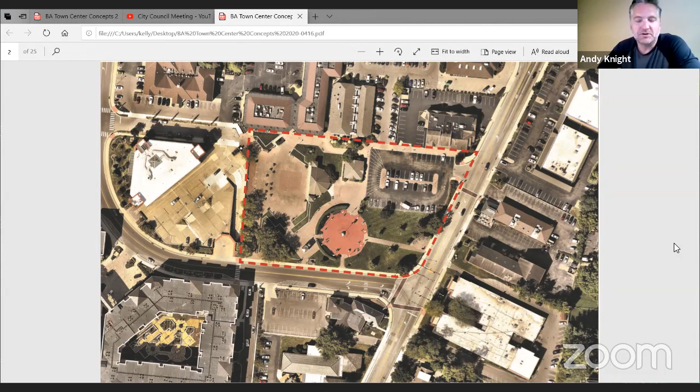So Kelly, if you'll advance a slide.

And we developed 3 concepts. These are just a couple of sneak peeks of what you'll see. We've got some renderings to give everybody a visual of what we've been exploring.

Concept A is to refresh, basically taking the framework and the structures that are there and improving some visibility, improving some safety elements, and just giving the park a refreshment there.

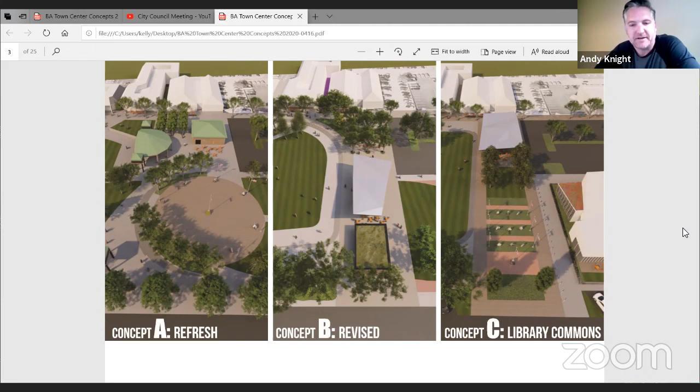Concept B is a revised concept where we take a look at repositioning some of the items, maybe making a softer landscape, more usable area. We've got some new residents at the 4900 that this is a space, this is their outdoor space, and especially with social distancing now, getting outside is becoming even more vital within our communities.

This is something that we want to be a resource, not only for them, but for the walkable community in the area, in addition to ceremonies and concerts. And then, as David was mentioning, concept C was more of a feasibility test to see what a 10,000 square foot library branch might look like on the site and how the site might embrace that and work together with it. So let's jump into concept A.

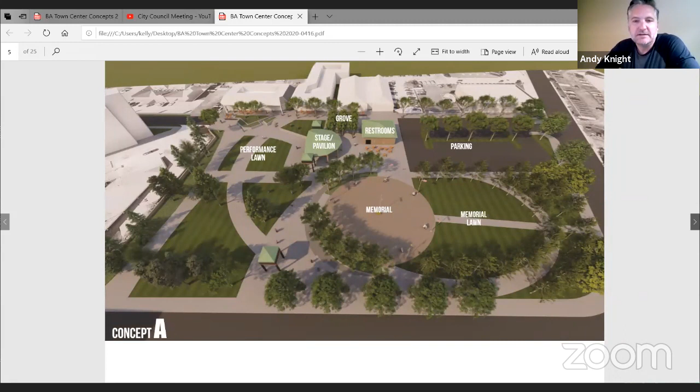You can advance one more slide, Kelly. Thank you. A little bit of a bird's eye. I've got a diagram that will follow this that will show you the different parts and pieces a bit more clearly. But you can begin to see in that large paver area that's existing today, peeling some of that pavement out and replacing it with lawn. That helps to reduce the heat island effect, and it makes it more park-like for daily activities, even for large or smaller events that happen there.

And we've got plenty - you all are well aware of the Summit Park lawn area and how usable that is when there's a concert going on. I actually have worked with Cleat on the development of a lot of that park, so I'm familiar with it as well.

The stage right now, at the edge of the stage, there's about a 4-foot drop, and there's a chain at the edge of it too, which is a little bit of a trip hazard since the stage is open to people. So one of the things we're looking at is installing a set of stairs on the edge of that stage so that people can traverse that a little more easily and have it meet certain code requirements.

Also, the memorial you'll see in this rendering, where we've removed the hedges and allowed for views from within the space 360 degrees, and put a set of stairs that traverse that grade change from the memorial down to the lower plaza area.

And then you'll also see that we've removed the terracing that is currently there in the bottom left-hand corner to create more usable space - maybe that's a dog park area. So anyway, those are kind of the highlights with this one. I'll go through a couple of views.

I think next is the diagram, Kelly. So you can see by and large, all the pieces that you're familiar with are still there, with the major difference here being that performance lawn and the event lawn.

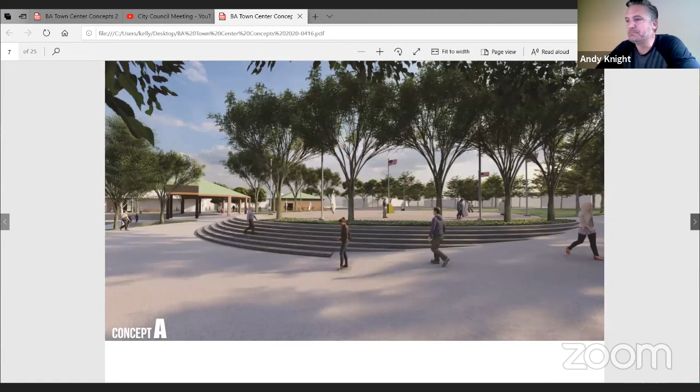One of the other things, Kelly, advance one more slide. You can see two different things in this rendering. One is the visibility of this memorial and the access to it now. There is a slope that as the Hunt Road moves north and south, there's a slope along that road. So this allows us to integrate stairs into that slope, space where people can sit, also a place where people can access the memorial.

You'll see in the background there where we've begun recommending removing some of the walls within the existing pavilion structure or the stage covering to allow more views. Right now it is basically an opaque wall that kind of blocks views north and south.

So exploring the idea of removing walls, keeping the structural integrity of the space as well, but allowing this to be a pavilion that could be used for not just concerts on summer evenings, but also something that could be rentable, where tables could be put underneath, and it's a covered space. Next slide, Kelly.

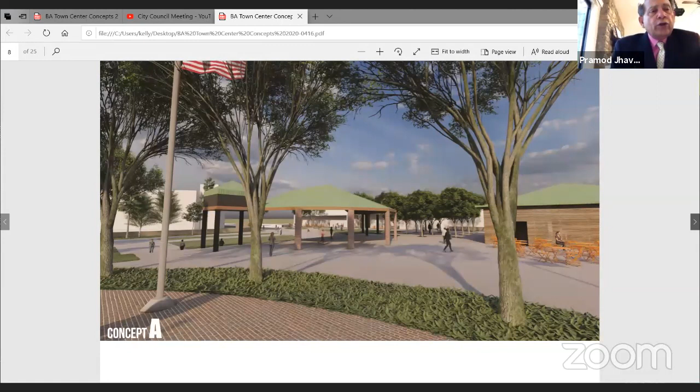Right in the middle of the screen, you're looking from the memorial space south to the stage pavilion structure. You can see where we've removed the walls, and it really opens up that structure. Keep in mind this is just at a conceptual level—there would need to be lots of studies—but either way, you get an idea of what it looks like to open up and breathe a little within the space.

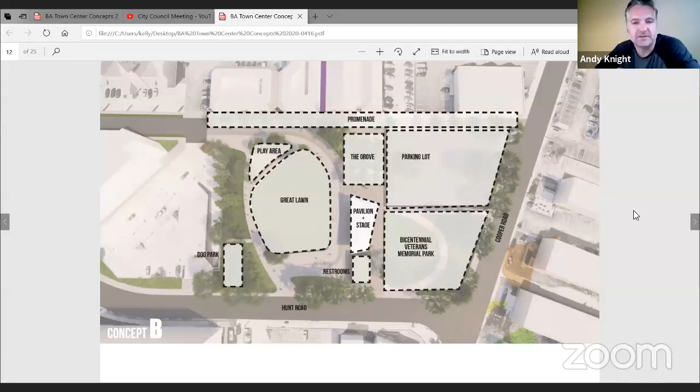You see the Great Lawn there to the left, and in the middle is where you have these activity zones with the Grove and the pavilion and stage. All right, next slide—let's see a couple of views of what some of these areas might look like.

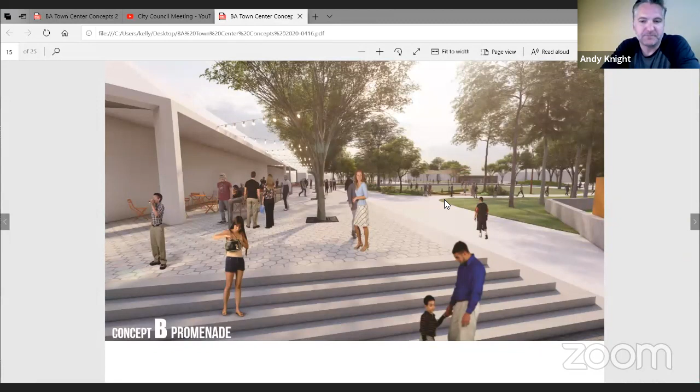Here's a view from the south looking towards the north. You can see the performance lawn to the right, but this would give an idea of the promenade. Right now there's a series of walls and planting beds that break this continuity up, and what we're proposing is that we break those walls down, create some steps so it's more porous along that area. It's not a narrow set of steps that get you from the space below up to the space above, but you can walk back and forth, sit on the edge of the steps. There's a lot of opportunity here. Add some green to the space in terms of vertical tree canopy.

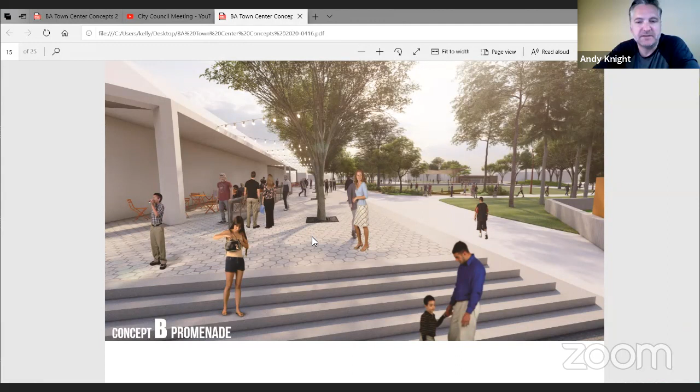Next slide, please. When I was mentioning the Grove a little earlier, you can see to the left over there where the stage is. In the background is the performance lawn, the green plains right there, so it gives you an idea of where this is in relationship to that. Behind us would be the promenade.

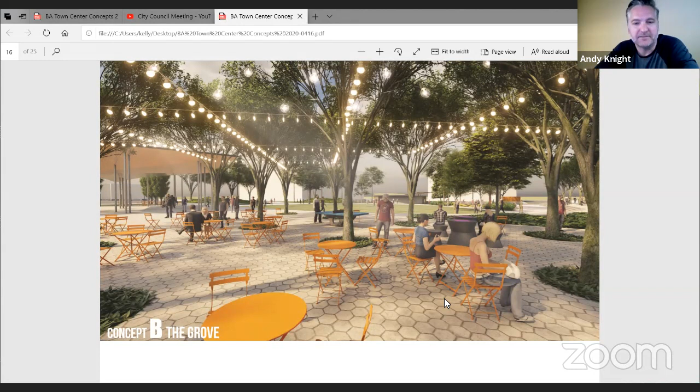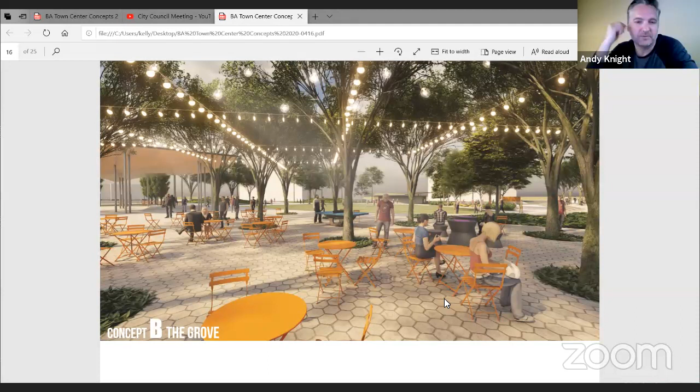This would be an area where we'd have some movable chairs that we'd recommend here. There are several options out on the market that are inexpensive. I know sometimes the fear is that some of these will walk away, and what we've done in a lot of instances is take the Bryant Park example in New York City and use those folding chairs. A company called Fermob makes them. They're very cheap and easily replaceable, but very light and easy to move around.

So you can create your own spaces within this area, which is nice to have that flexibility. Or you can fold them up and take them away, have a big long table, and have a fundraiser within this area if you want to. Okay, next slide please.

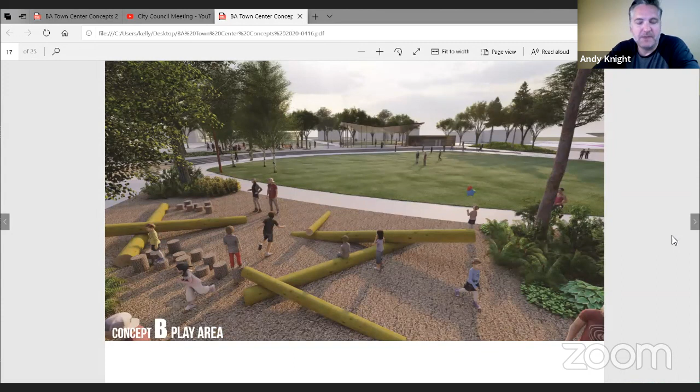I mentioned the playground area again, a placeholder now, but instead of putting a catalog play equipment piece in here, what we're suggesting is that it becomes a little more adventure play. This is nestled right between where the promenade is, where people may be eating, so you've got that convenience. It's also next to the performance lawn, so there's some convenience there for children to be playing in this area and parents to be able to have their eyes on them.

Third concept, concept C, which we're calling the Library Commons. Again, this was a feasibility test. Basically took about 10,000 square feet, which is similar to what the existing branch library is that's close by.

We placed this in the northeast corner of the site, so it's got some good prominence here. It's adjacent to the existing parking lot, but we don't have space on here to add additional parking. So that might be one fallback from this concept.

In this one, the memorial space is still in its same location, but we changed the geometry of it, so it's more layered, still with the ability to have ceremonies within that, but also use the performance lawn as well for kind of spillover space. And then the stage in this concept is pushed into the corner of the site. It could be used as a pavilion, but this is more one-sided in this instance, where we've got trees in the background.

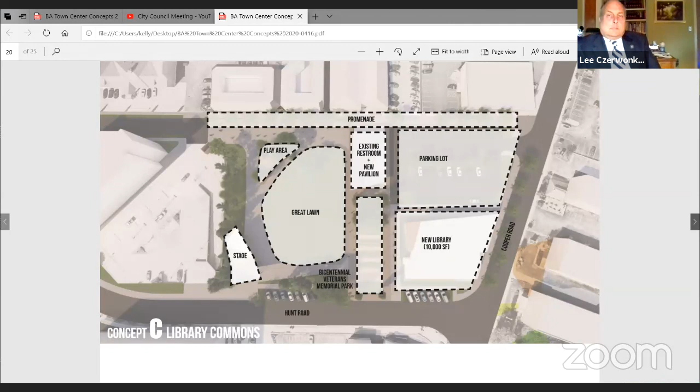Still have the playground as well, so still exploring the promenade idea in this concept also. Next slide, you can see all the components and how those are laid out.

And just a couple of views. We didn't want to play architect too much, so don't get too caught up in the design of the library, it's just a placeholder. But you can see the performance lawn there in the background.

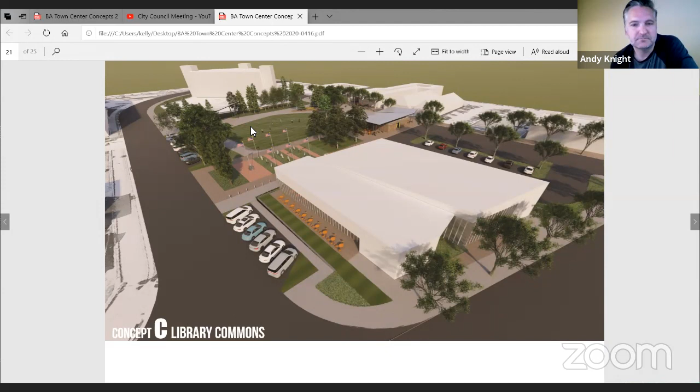Next slide. And then its relationship to the existing parking lot. Next slide.

In this one, what we were suggesting is that there may be an overhead canopy that extends out from the existing restroom. So that's where this view is from, kind of looking towards the stage back in the southeast corner of the site. The library would be off to your left, and just to the left there, the memorial.

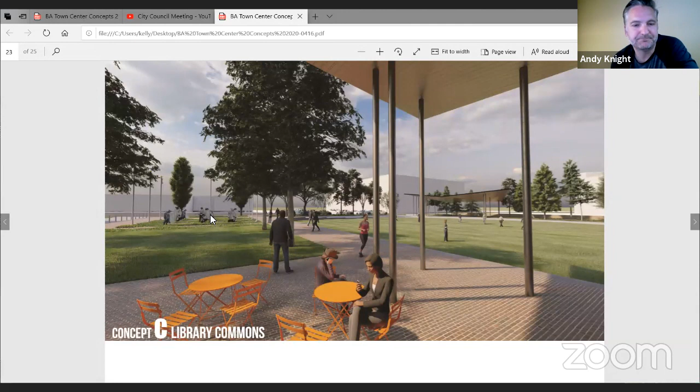Okay, next slide. So those are the three options. We have put a dollar figure to these. Again, it's at a concept level, so these are rough numbers.

Kelly, if you want to advance to the next slide, it'll kind of break those down for you. So concept A, we're looking at a range between roughly 2 million to almost 3.25 million for those renovations. That includes renovations to the pavilion as well and the restroom building.

Second concept, which is kind of the preferred version, seems to fit well all the anticipations of how this park wants to be used. We're looking at a range between 5 to 7 million there. And then the library improvement, which does not include the budget for a new library or any parking facilities associated with it, we're looking at a range between 3.8 and 5.5 million.

So at this point in time, if anybody has any questions, I would be happy to answer them.

Before we do that, I think the best thing to do in this scenario, like we did the last meeting, is have the mayor go around and give everyone an opportunity to make a comment, so it's not a free-for-all. But I want to shape the expectation of what we're looking for tonight. Certainly no approval on concept A, B, or C, or where you want us to go. I think this is something that you need to spend a little bit of time thinking about and looking at. As I said before, we think something closer to B makes the most sense.

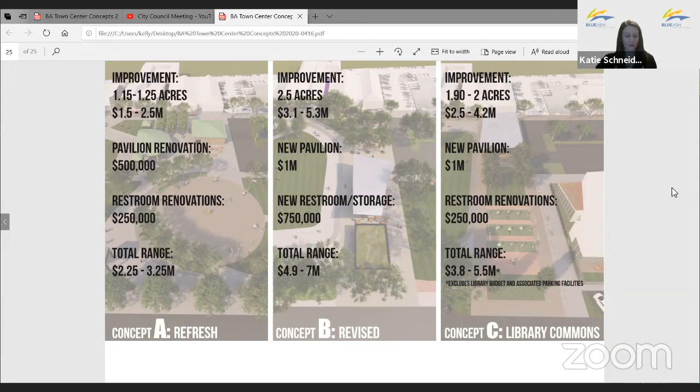Thanks, Katie. Joe? I'm all over concept B. I really am. I've been asking for a grass field down there forever. I just think that's the best.

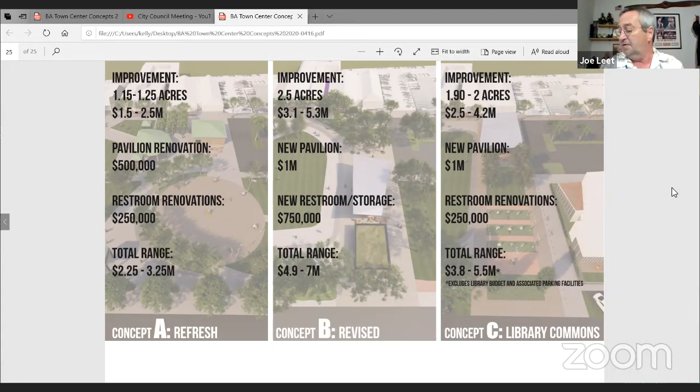My only question with B is that with the promenade, that's where the grass is at now, and back there by the pizza place on that little wall, that's the way that's set up. That's going to be in the sun now, where it used to be in the shade, if you put the promenade in as where the concept's at. But other than that, and the question, where would the soldiers be in concept B? I didn't see that anywhere. But I'm all over that. I just think that's the neatest design ever. I really, really do. Concept B all the way.

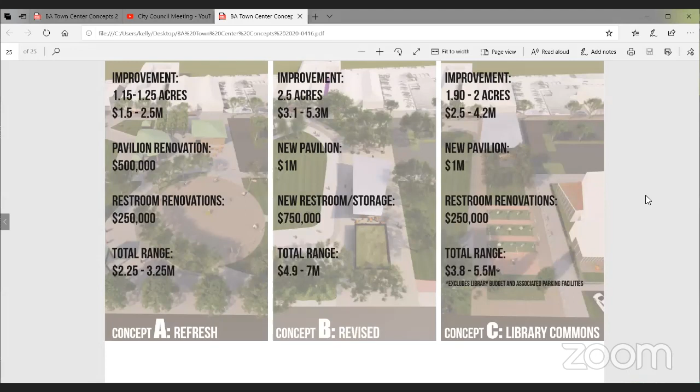Hey, Mayor, this is David again. Kelly, could you go back to concept B? Because that's a great question. I don't want anyone to have missed that and think the memorial got squeezed away. In fact, we really think it'll be enhanced.

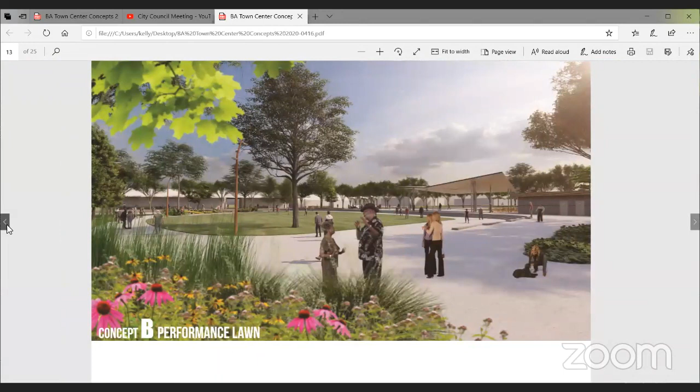Yeah, so there you go. It'll be enhanced. It'll actually be more visible because it'll be pushed up closer. Bingo. Now we do have the option of recreating it exactly as it is today and simply shifting it over. We just felt, for purposes of this conversation, there perhaps is a different way to lay that out, so it has kind of a timeline as you walk through there. But there's no hard design on that at this point.

No, Dave, I see them. I just didn't see him there in the original, in the first showing or viewing. They're there. That was my only concern.

I'd say this here's a winner, buddy. This is a winner. I just wanted to make sure, not only for council but anyone listening, because I know there's that sensitivity about the memorial from the past, that the concept here is it's going to have, as Andy said, more visibility as it gets a little closer to Cooper Road. If we're moving it, we ought to at least examine if there's a better way to configure it or not. We may ultimately not go that specific way, but just wanted to show another way. The thought here is some sort of walking through the years, but we're not locked or loaded on that. The one nice thing is we should probably review this with the American Legion and get their feedback too, going forward.

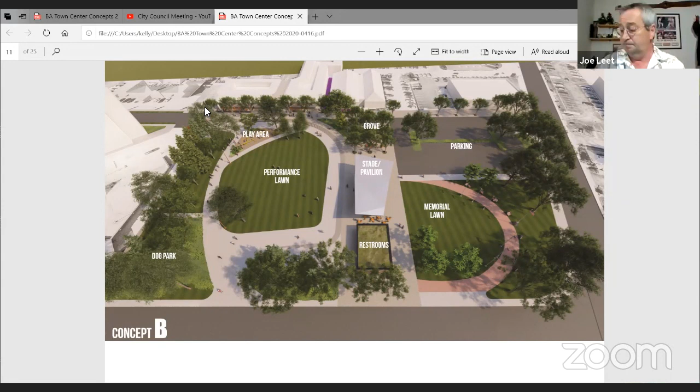Well, this is very exciting to be thinking about all of these options. And I would agree that B definitely is the one that stands out. As much as I would love to see the library worked into this, I agree that it seems like we would be forcing that, so that probably is not going to be a fit. But I do really like the opening up of the stage and giving more options and being able to utilize that a lot more. And I agree with Lee that we should probably run by the American Legion to make sure that they're happy with the changes with the memorial, but certainly it looks very attractive to me.

One question I had was, are we envisioning real turf grass here on these lawns, because people would be sitting on these for concerts and such, like a Riverbend? Just curious. Andy, do you want to go ahead and answer that?

Yeah, sure. We get asked this question quite a bit, and there's a couple of things. One is money. A synthetic lawn runs about $17 a square foot, whereas a well-drained sod lawn runs about $4 a square foot, including all the drainage and sub-drainage that goes along with that. So it's well drained, and we typically end up doing the regular lawn. We may do synthetic lawn in certain areas where it makes sense. But the other thing we found is on hot days, the synthetic lawn actually gets fairly hot as well. What natural turf does is cool the area, whereas synthetic lawn, even though the technology is getting better, I still don't think it helps cool the space like a natural lawn does.

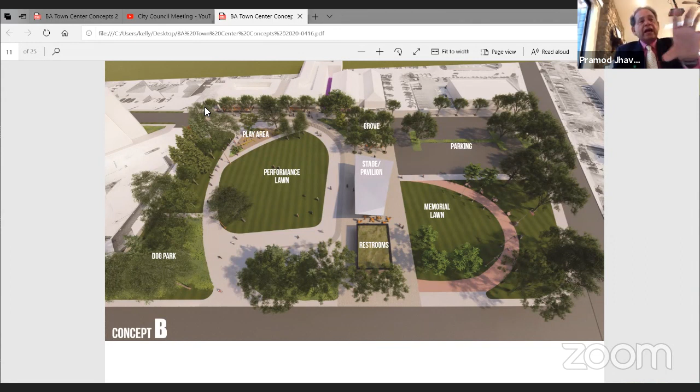But on the deciding points, I need to see more details on these plans, because with what I see right now, I cannot visualize exactly how it's going to look like. So just like Katie said, I want to see more in the printed version so we can really see how it looks. That's number one.

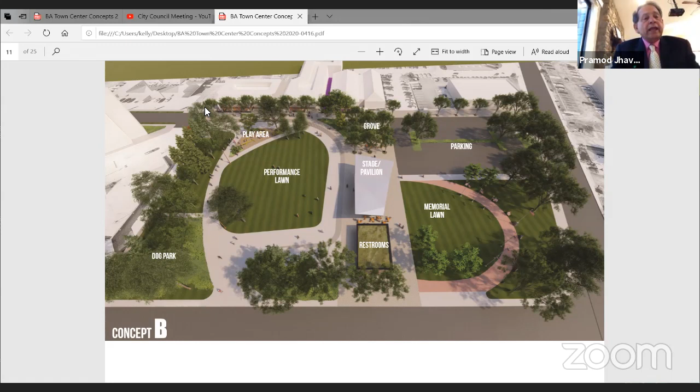And the third one, I was talking about, say if we go with plan C, for the library, are we going to replace the library from where it is to the park? If it is, then we're using a lot of space, and we're just putting so many things in one place. That's what I'm thinking. Answer me after I finish about the library.

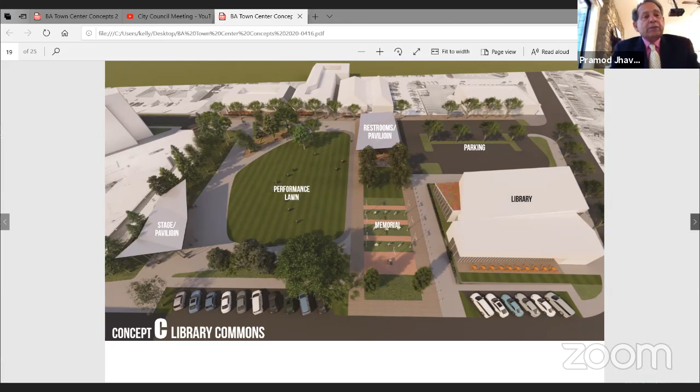Another thing, have you considered increasing the parking lot? Are we having the same parking as what we have now? I don't know how many parking spots we have, like 20, 30, 40. Can you consider increasing the parking a little bit more, not just one level, maybe a two-story platform where we can increase the parking? I've gone so many times to Sleepy Bee to eat and I've never found parking. I had to go somewhere else, and they're losing a lot of business over there by not having parking. So I want to put my two cents on increasing the parking lot. That might increase the cost, but I think that will serve the purpose for a lot of the restaurants over there and a lot of other activities we're going to have.

And the other one I have is the dog park. I agree with similar thoughts, just like Jeff had it. I'm really concerned whether we want to put a dog park over there or not. So I'm really concerned with that.

And the fourth question I have is about the soldiers memorial — are we putting it in a different form than what it is right now? Would it be possible to put it in the same form? I'm just putting a thought for MSK to think about, whether they incorporate it or not. Some people may come out and say, hey, I do not like this format of putting all the soldiers in one line instead of having a circle with the flag in the center.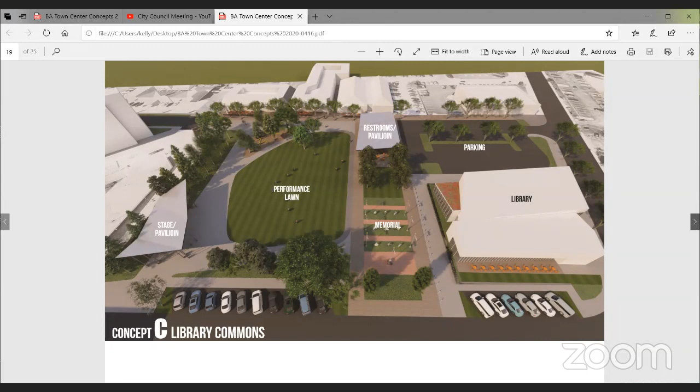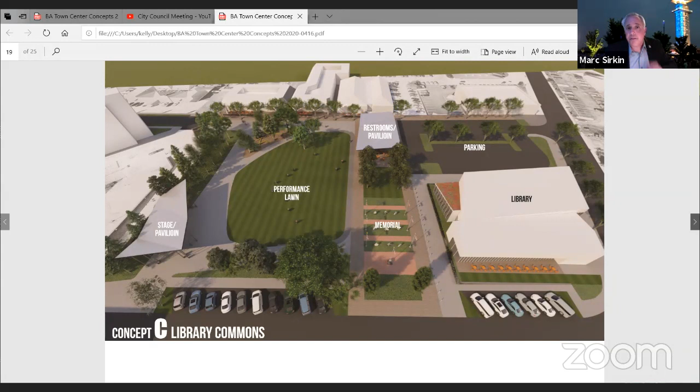Thanks, Dave. Real quickly, I think option C just takes too much light, too much view. It's too tight for the space. I'm not in favor of it, as much as I'd love the library to be there, I think we need more space to put it there. A and B I both thought were lovely, especially the Grove, the promenade, the playground would be wonderful. Maybe a mixture of all.

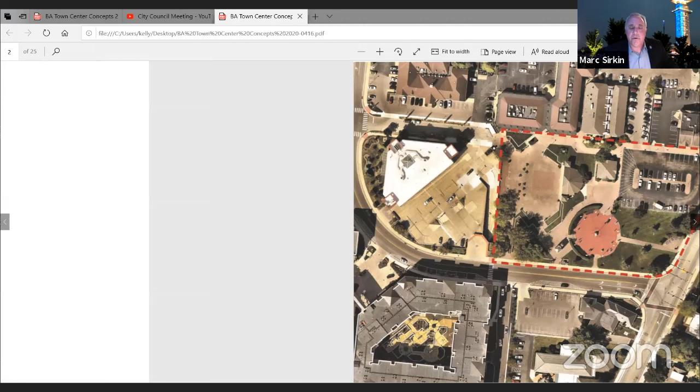And I agree that before we go a whole lot further, we need to get together some of the veterans and start looking at what their feelings are on making any changes. I think it might be a little difficult to get the veterans all on the same page and all agree to a particular design, but I think that sensitivity is more important before we start planning what we're going to build around wherever the memorial ends up being and in what iteration.

So thank you very much. It looks beautiful, and it will be beautiful. And like I said, this is a nice project. We're not in a rush to do it tomorrow. We can take our time and figure out what's the best way functionally and aesthetically.

I want to reiterate your sentiment about being in no rush. It's the same thing we've done very successfully in the past: lots of public engagement, lots of open houses. Summit Park went through quite a bit of a process, so anyone that would suggest that isn't the case obviously hasn't paid much attention. Especially on something like this, we would really relish that opportunity. As I said, it's going to be a little bit of a challenge this summer from the traditional format because our ability to gather people is easily not going to be there, but there is no rush on this, so no one needs to worry about that.

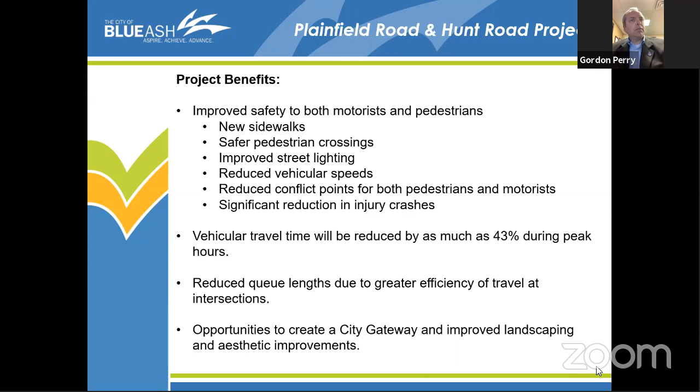In the past couple months, we've met with some interested parties—Kroger's and Kohl's—in a conference call with ODOT to discuss their concerns and the project as it relates to them. We've also had a meeting with Kroger to discuss a similar aspect of the project in relation to their site.

ODOT has approved the stage 2 drawings and plans, our NEPA environmental document, and our right-of-way plans. So we're moving on to the stage 3 drawings, the plan set used for final construction. Next, I want to go into some of the design concepts for the intersections and roundabouts.

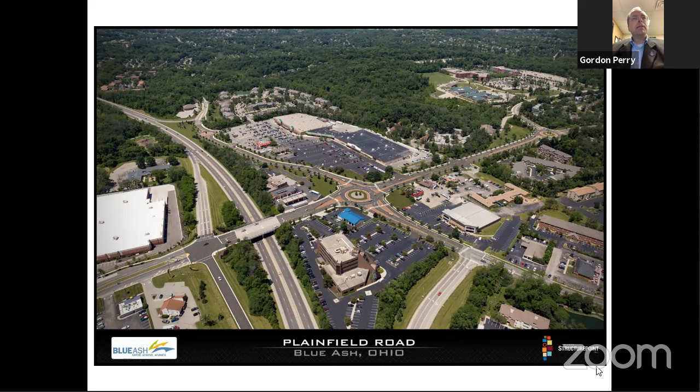Please move forward to the next slide.

We've been working with Pod Design, a landscape architect we worked with recently on the Downtown Gateway project. They did a great job for us there, and we're excited to work with them again on this project. This landscaping work will follow up the roadway project—once the roadway improvements are completed, we'll invest in upgrading the visual aesthetic.

These aren't just concepts—these are actual, in-place constructed roundabouts, located in South Bend, Indiana; Carmel, Indiana; and Fishers, Indiana. You can see they use a wide variety of landscaping amenities, and we'll go through some of those concepts.

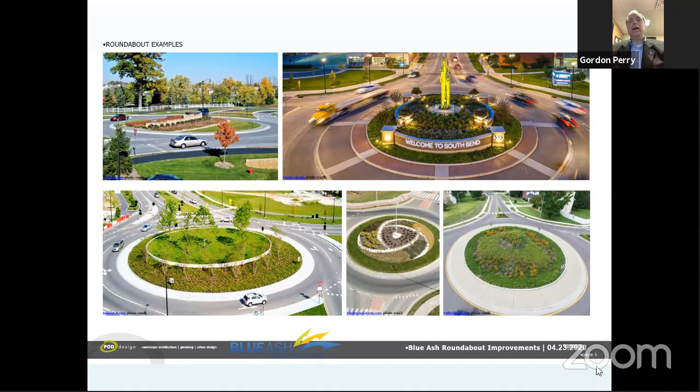One thing on this page is of particular importance—it gives us an opportunity to do something with the gateway. Looking at the upper right-hand roundabout, which says 'Welcome to South Bend,' we could do something similar. A gateway feature at Plainfield and Hunt would be a great location for that. Next slide, please.

Some of the amenities we can put into these roundabouts are hardscape details—pavers, boulders, and low retaining walls. Next slide, please.

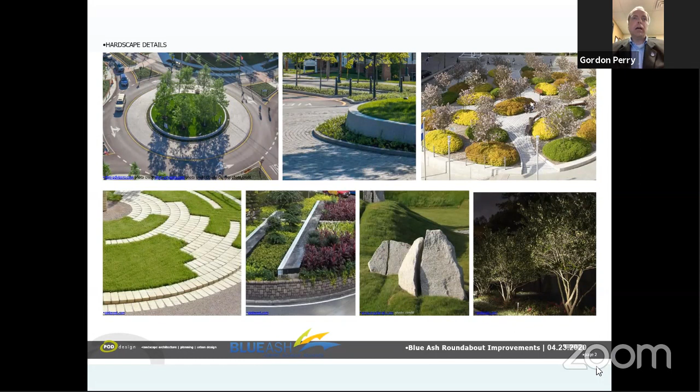It can also include specialty features, like monuments.

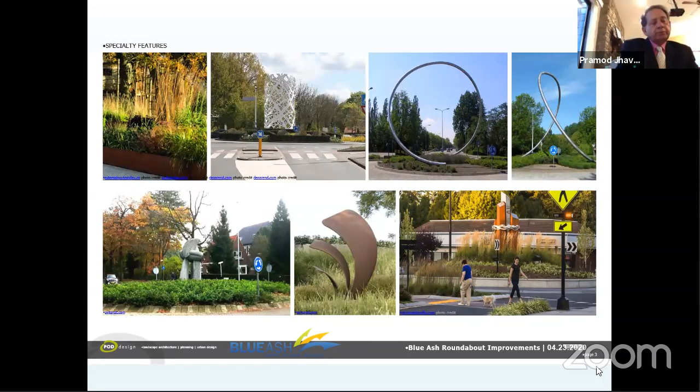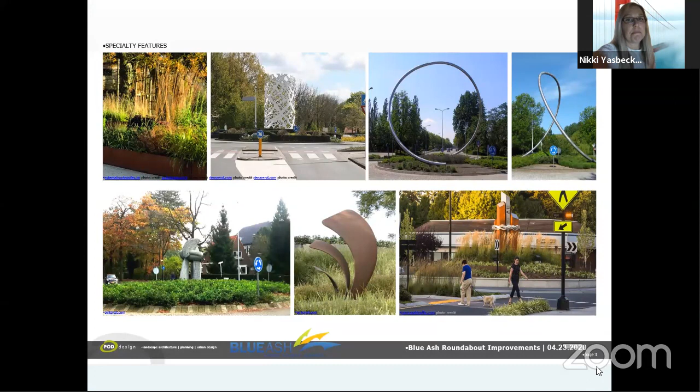I'm sorry? There's a lot of echo coming through. Okay, that's because everybody needs to mute—if they did that, we wouldn't have echo. Exactly, right. Okay, I'll try to continue on here.

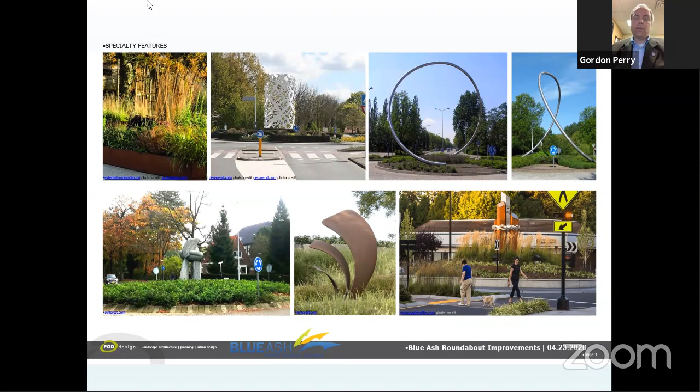This shows some ideas for monuments or other items that could be placed in the central portion, which could include the entry feature we discussed at Plainfield and Hunt as a gateway feature. Next slide, please.

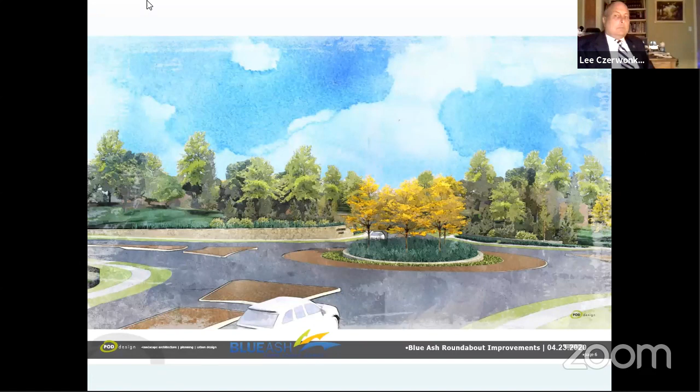These next couple of slides are actually based on the topographic information from our design set. This is actually a computer design made to look like a watercolor, just a very preliminary rendering showing some of the options we're looking at. This is the Plainfield and Peppermill intersection.

On the right-hand side of the picture is Reed Hartman. Where the white car is at the bottom of the screen is Plainfield coming from UC Blue Ash, and the roundabout is in the center. What you see is the retaining wall that's part of the project on the middle part of the left-hand side.

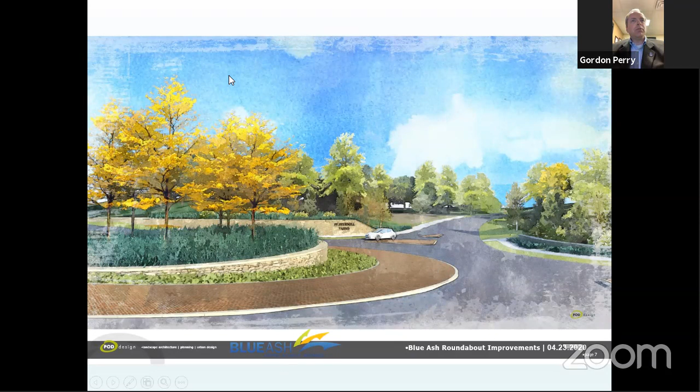This is another view, looking at the Peppermill intersection. The white car is coming out of Peppermill in this rendering. The retaining wall where the car is shows potential for signage on the wall. The signage could be added for the Peppermill Farms subdivision, giving a place and a gateway to their subdivision, and it can also be accentuated with landscaping.

Some of the details we showed before with softening the wall with overhanging landscaping could be added there. We can also use consistent themes in the rock walls with the landscaping islands in the center of the roundabout, as well as on the southeast corner. So those landscaping elements with the low walls could be added to have consistent landscaping themes throughout the entire intersection.

This is our final rendering, another view coming out of the Peppermill subdivision. In the center island, there are typically some engineering requirements which would require height elements to prohibit the line of sight. So we do have some requirements we have to follow there, but we just wanted to go over and share some of the things we're currently working on as we begin this design process for the aesthetic quality of the corridor.

If you wouldn't mind offering some feedback or suggestions of what you like, don't like, and anything else, I'd be willing to entertain that.

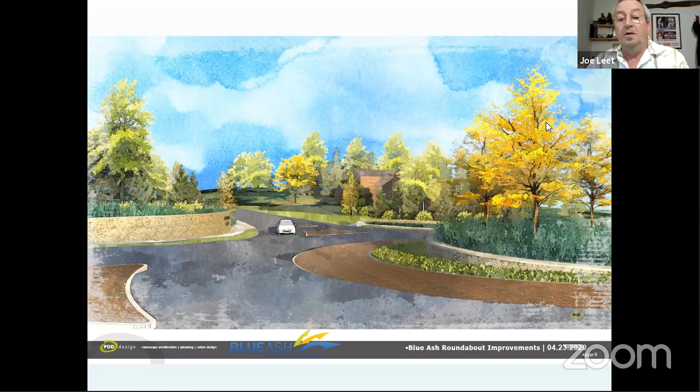Sorry, we're doing this. Maybe it would be best, Mayor, would you like to? Yeah, you probably could just run right down the list, and if anybody has anything to say, this would be a good time, and then we can circle back if there are more questions. PJ, you look like you wanted to say something first.

No, I just wanted to ask, out of these three circles that we're getting in, is there any way to put a water fountain, just like we have downtown? That's all my question is. Is it possible? Is it inexpensive or expensive? How would the maintenance be done or anything like that? Can you enlighten us a little bit on that?

Yeah, that's a great question, and that does come up from time to time. We would probably not want to have water features in the center of the roundabout, primarily because when I was in West Chester, we actually had a water fountain in a roundabout, and we had issues with water blowing out into the roadway. It kind of created an issue, so we probably would steer clear of that.

Okay, makes sense. Is that all, PJ? Yes. Jeff, you got anything you want to add?

Yeah, so at this point, are we really just talking about what we've been presented so far tonight, or are we eventually going to talk more about the larger issues of the project? This is my update. You can ask any questions you want, but I was just sharing with you the update on the landscaping design.